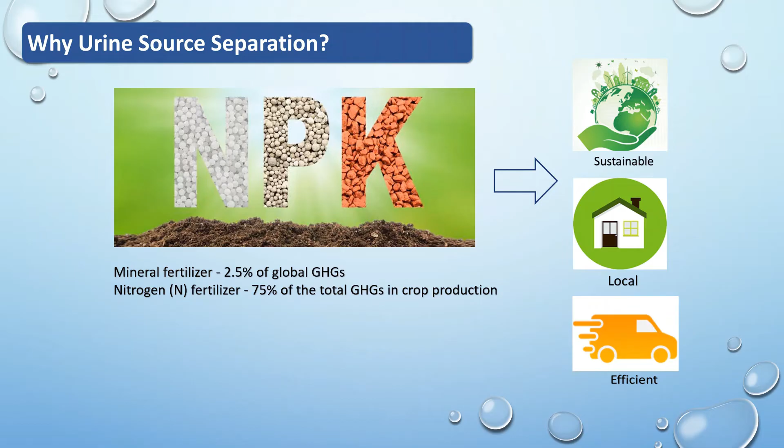Thanks to the urine diversion toilets, they make our wishes fulfilled. Yes, we are talking about human urine. Do you know that what we treat as a waste can actually be a liquid gold, containing all nutrients that plants need to grow? In fact, it contains up to 90% of nitrogen, 80% of phosphorus, and 90% of potassium in only 1% of the total wastewater volume. This unique composition makes it, at the same time, a heavy burden for conventional biological sanitation.

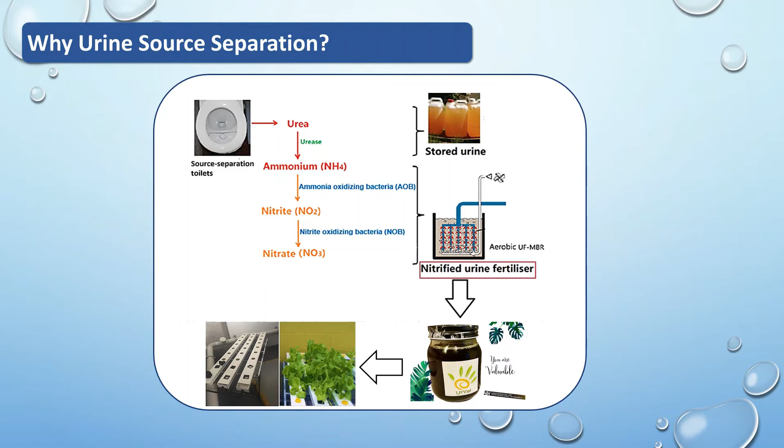The MBR in this design is therefore functioning as a stabilizer: it oxidizes unstable ammonia into stable nitrate, removes bad smells, and reduces solution pH. By doing so, we can achieve a complete nutrient recovery, maintain a balance between supply and demand in natural resources, reduce wastewater treatment plants' operational cost, achieve high effluent quality, replace or reduce chemical fertilizer usage, save water, energy use and greenhouse gas emission, provide households additional incomes and contribute to food security and self-sufficiency in the agriculture sector.

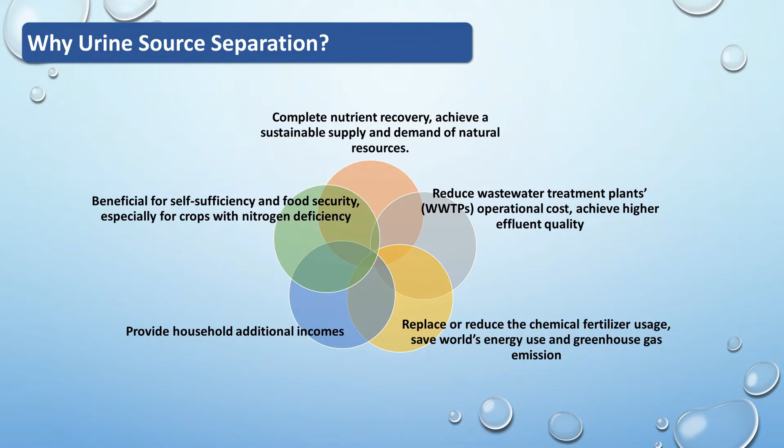Like any membrane-assisted technologies, membrane fouling will continue to be a major challenge for the application of MBR in urine nitrification. Membrane fouling can lead to transmembrane pressure increase, decline of permeate quality and membrane performance, increase of membrane operation and maintenance cost, and decrease of membrane module lifespan. The concept of critical flux and critical flux for irreversibility in submerged MBR has been proposed to control membrane fouling and optimize system treatability.

However, no publication has yet investigated the reversibility of membrane fouling in UFMBR fed with hydrolyzed human urine. Most previous literature evaluated membrane filtration performance in submerged MBR for municipal wastewater or greywater treatment, which has substantially different fouling propensities. As such, an investigation of the critical flux and its reversibility in UFMBR fed with undiluted source-separated urine was conducted in this study.

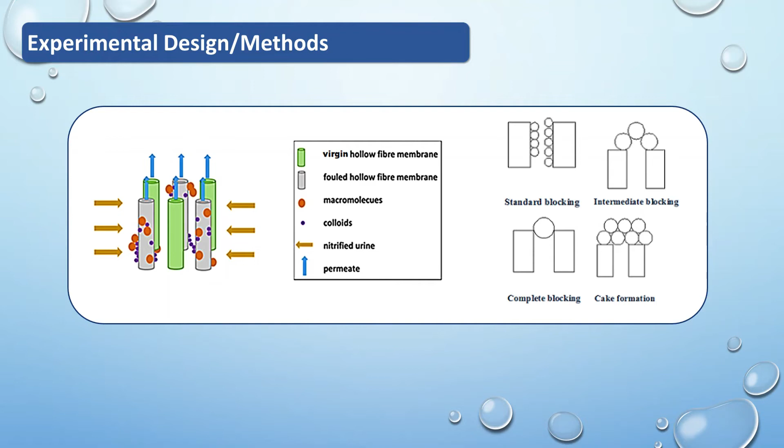A lab-scale UFMBR with a total effective working volume of 4.5 liters was operated to treat hydrolyzed source-separated urine. The feed stream constitutes an automatic pH controller and pump, designed to achieve continuous feeding and maintain the pH of the sludge mixture at approximately 6.2 during the entire operation period. An air diffuser was placed at the bottom of the bioreactor to maintain the dissolved oxygen level in a range between 4.3 and 4.5 mg per liter.

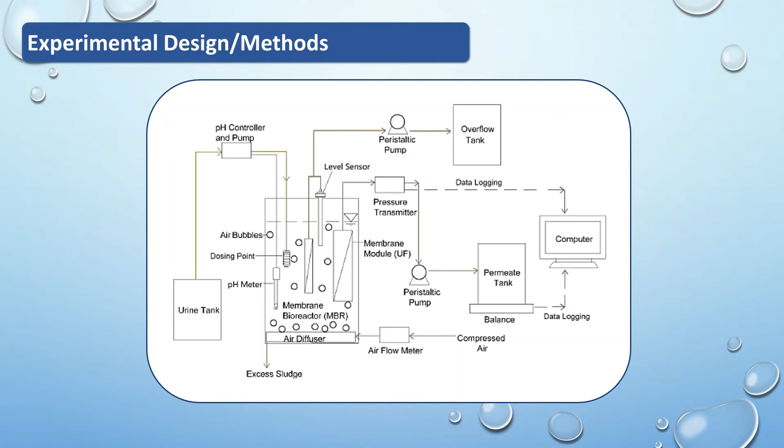A UF membrane module with a total effective area of 0.02 square meters is used in this study as well. The transmembrane pressures were measured by a pressure transmitter. An additional set of supported UF membrane modules was connected with an automatic water level controller to control the minimum and maximum water level.

The impact of free ammonia and free nitrous acid on nitrifying bacterial activity during UFMBR startup and stable operation was studied in this section as well. The first nitrite accumulation occurred within the first 19 days of operation when the pH of the reactor fluctuated at a relatively high range.

This implies that the pH change could lead to the FA and FNA inhibition on nitrifying bacterial activity. The specific growth rate of AOB is higher compared to that of NOB growth rate within the discussed pH range, resulting in the accumulation of the nitrite intermediate.

The second nitrite accumulation was observed from day 30 to 64 when reactor pH was maintained at the desired pH value. One reason for this observation could be due to the large amount of free ammonia available inside the reactor. The increase of free ammonia to 2.3 mg per liter under ammonia nitrogen shock loading inhibits the NOB activity, resulting in unbalanced growth between AOB and NOB.

The UFMBR was capable of adapting to stored human urine from day 87, and the system was maintained at the desired pH value around 6.2 for stable operation. pH readings always fluctuate after the pH electrode cleaning and calibration, where the nitrification process remains stable. This implies that pH fluctuation can be an indicator that reflects the instability of nitrification to some extent, but free ammonia and free nitrous acid concentrations are more useful in order to control inhibitory effects and maintain the system's stability.

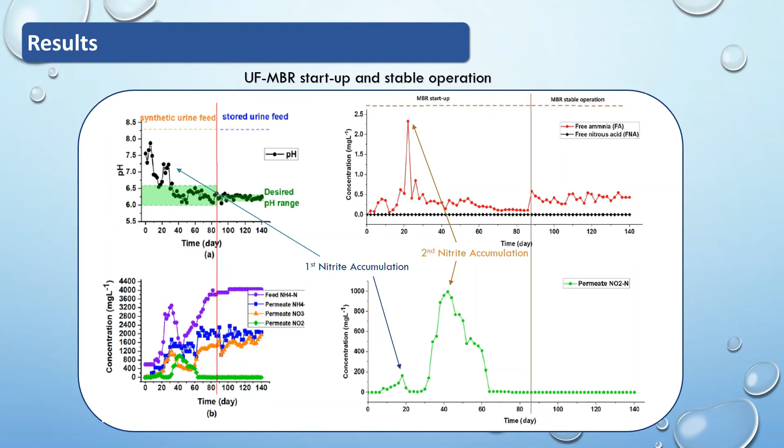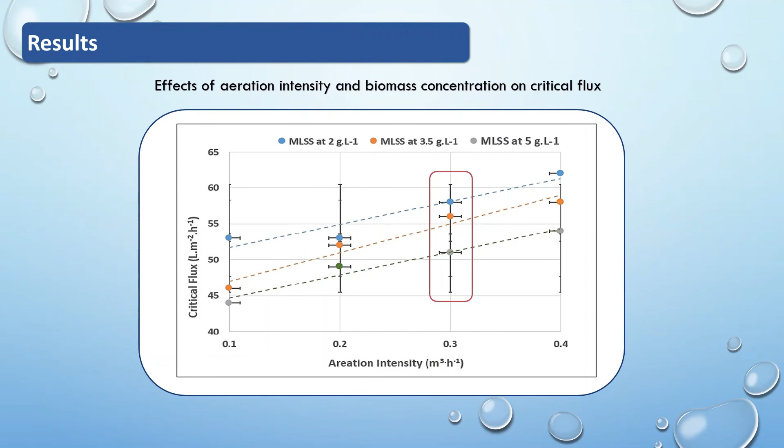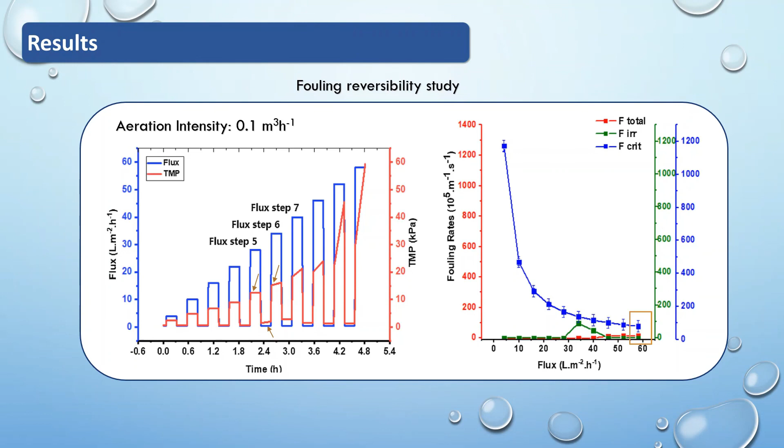In summary, the pH fluctuation can be an indicator that reflects the instability of nitrification to some extent, but free ammonia and free nitrous acid concentration are more useful in order to control inhibitory effects and maintain the system's stability. Secondly, the influence of fouling on membrane can be alleviated by intermittent relaxation or moderate aeration intensity.

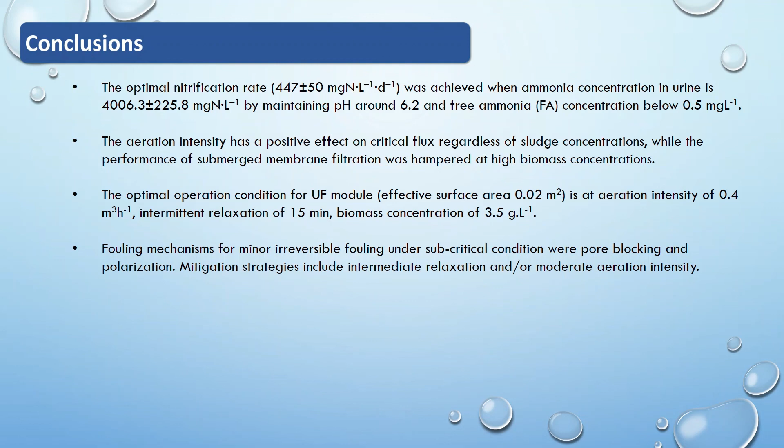Due to adsorption of micromolecular or colloidal organic matter inside membrane pores and formation of polarization layer at adjacent membrane surface, a small amount of irreversible fouling was gradually built up on the membrane, despite the membrane filtration operated at subcritical conditions. To operate nitrifying UFMBR at the subcritical flux does not prevent the gradual development of the fouling on membrane. The fouling mechanisms for minor irreversible fouling under subcritical condition in our study were pore blocking and polarization.